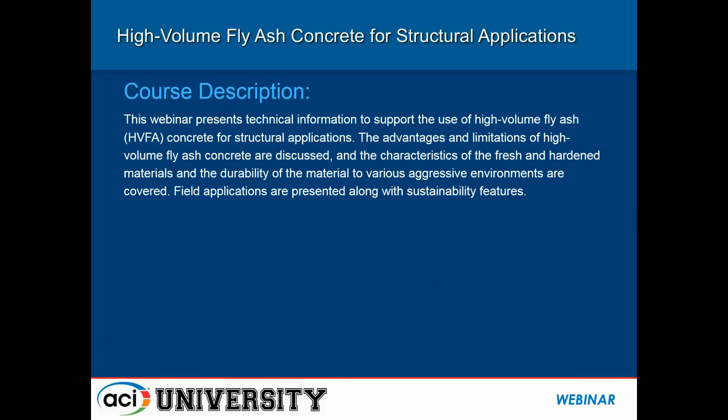ACI is an approved education provider for the American Institute of Architects, and this webinar has been approved for one learning unit. This webinar reviews the information found in ACI 232.3R-14, Report on High Volume Fly Ash Concrete for Structural Applications. Our learning objectives for this webinar are as shown on the screen. They are also shown in your handout.

And now I'd like to introduce our speakers for today. Bruce Ramme, PhD, PE, and Fellow of ACI, is the Vice President of Environmental Engineering at We Energies and is responsible for compliance, strategy and planning, mitigation and risk management, environmental permitting of new projects, compliance assurance and identification of new and/or enhanced means of benefiting the environment through the business practices of We Energies, the principal utility of Wisconsin Energy Corporation.

Another speaker today is Michael Thomas, PhD, Professional Engineer and Fellow of ACI. He is a professor and department chair in the Department of Civil Engineering at the University of New Brunswick and a registered professional engineer in the province of New Brunswick. He has been working in the field of cement and concrete research since 1983. Dr. Thomas's main research interests are concrete durability and the use of industrial byproducts, including pozzolans and slag.

Ivan Diaz-Loya is a research and developmental manager at Headwaters Resources in Taylorsville, Georgia. He is a member of ACI Committees 232, Fly Ash and Concrete, 240, Natural Pozzolans, and 236, Material Science of Concrete. He received his PhD from Louisiana Tech University. His research interests include fly ash reactivity in concrete, alternative supplementary cementitious materials, and reuse of coal combustion products. And now I will pass the presentation over to Ivan.

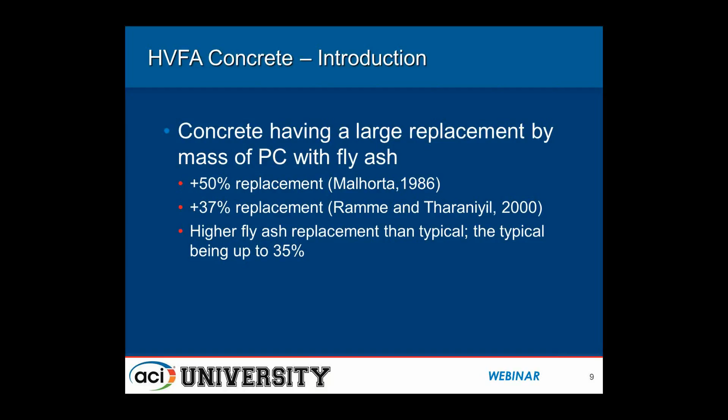Well, let's start with a definition, which is kind of a gray area. So what is high-volume fly ash concrete? ACI 232 defines it as concrete having a large replacement by mass of Portland cement with fly ash. But what is a large replacement? Malhotra in 1986 defined high-volume fly ash as more than 50%. More recently, Ramme and Tharaniyil in 2000 defined high-volume fly ash concrete as more than 37%.

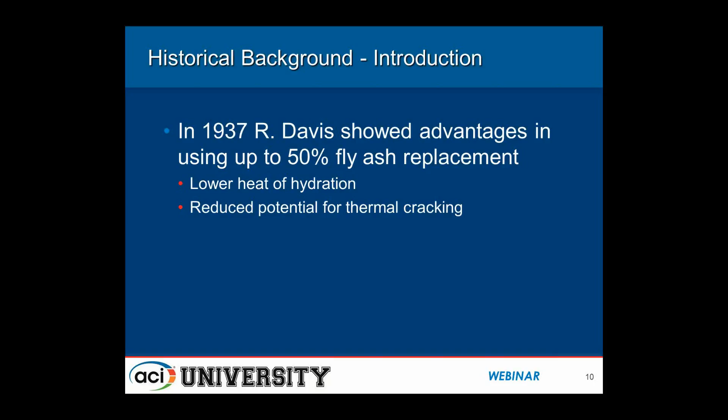Now, another definition is higher fly ash replacement than typical. And most would agree that typical would be considered up to 35%.

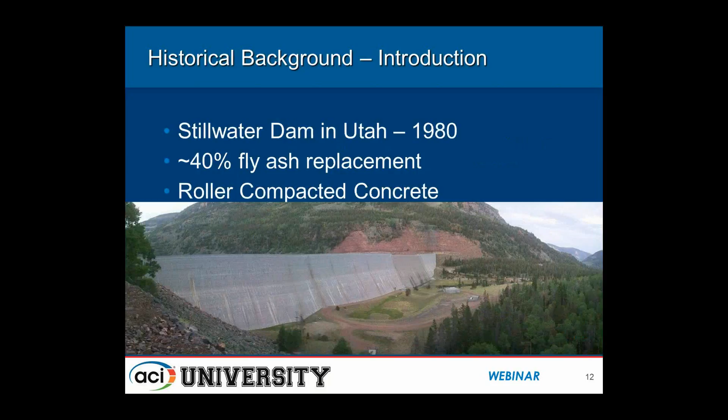So just to give you some historical background, Raymond Davis, professor from Berkeley, along with some of his colleagues, were the first to highlight the benefits of using fly ash up to 50%. The benefits they highlighted were lower heat of hydration and reduced potential for thermal cracking.

Their findings were applied in the construction of the Hungry Horse Dam in Montana. Another example is the Stillwater Dam in Utah, which was built in 1980 with roller compacted concrete with a 40% fly ash replacement.

Other applications of structures that have been built with high-volume fly ash concrete include roads, foundations, retaining walls, marine slipways, sewage treatment works, and concrete viaducts. And Bruce Ramme will speak more about examples in field applications.

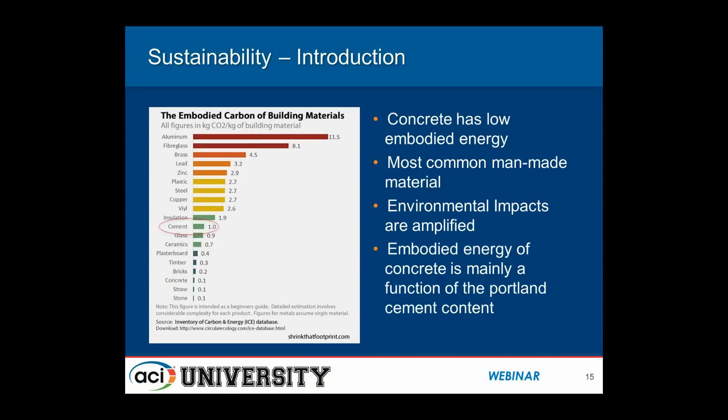So in recent decades, sustainability has been added as a major benefit of high-volume fly ash concrete, added to the lower heat of hydration and reduced potential for thermal cracking. Now, concrete has a relatively low embodied energy compared to other construction materials. However, it's the most common man-made material in the world, by volume, that is. That means that its environmental impact is greatly amplified due to the high volumes that are produced.

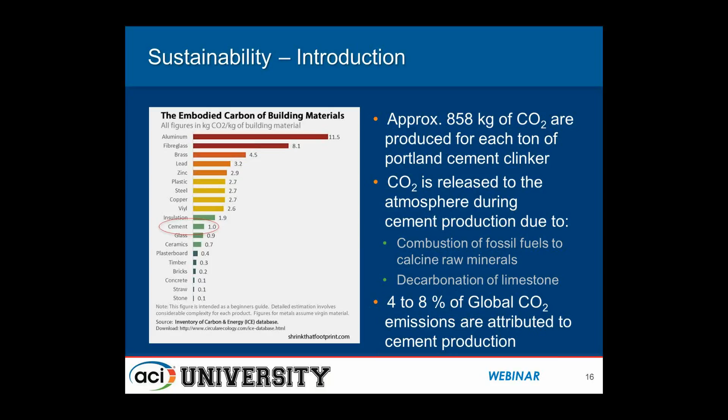And this embodied energy of concrete is a function of the Portland cement content in the mixture. That's because close to a ton of CO2 is released for each ton of cement that is produced. This comes from the burning of gas or whatever it's being used to fire the kiln, and from the decomposition of calcium carbonate into calcium oxide and carbon dioxide. Different authors attribute anywhere from 4 to 8% of the global CO2 emissions to the production of Portland cement.

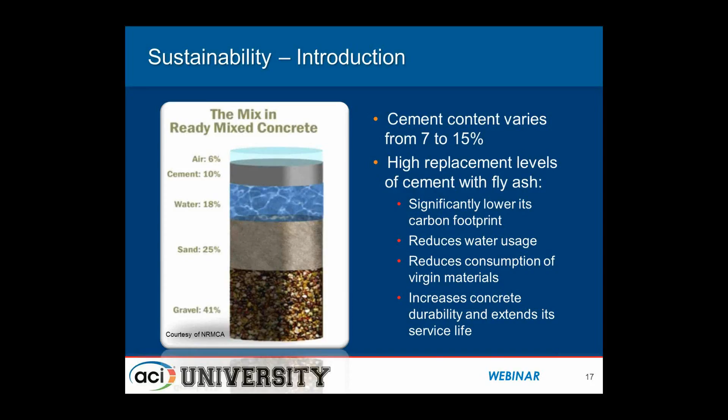So increasing the replacement level of cement with fly ash significantly lowers the carbon footprint of concrete. It also reduces water usage since fly ash typically lowers the water demand. It also reduces the consumption of virgin materials that are necessary for the production of Portland cement, and increases concrete durability and service life, which is actually one of the most important factors because you're avoiding demolition and building new again with the carbon footprint that entails.

High volume fly ash concrete can be split into two categories: general use and high performance. General use is typically adequate for requirements of 3,500 psi or less. It takes longer to set than regular concrete, and strength development is somewhat slower than conventional concrete. For this concrete, the strength requirements are typically extended to 56 or 90 days, and it contains no water-reducing admixtures.

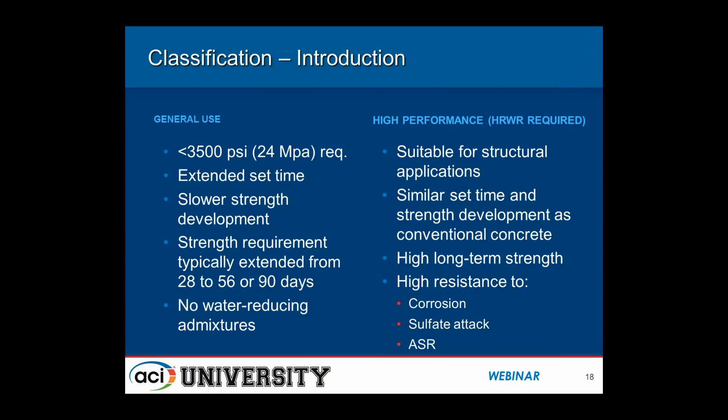High performance, on the other hand, requires the use of high-range water reducers and oftentimes accelerators. It can be used in structural applications. It can have the same set time and strength development as regular concrete, but it has very high long-term strength. Typically, the 1-year strength is double the 28-day strength. The durability benefits include high resistance to steel corrosion because of its low permeability, sulfate attack for the same reason, and ASR expansion because you essentially have a high amount of highly pozzolanic material.

Either Class C or F can be used in high volume fly ash. However, most of the work to date has been done with Class F. The C618 requirements are the same for both, except for the main oxides. For Class F, it has to be at least 70%, and for Class C, 50%. Class F comes from bituminous or anthracite coal, while Class C comes from lignites or subbituminous coal. Class F has a low calcium content, while Class C has a much higher calcium content. As a result, Class F has pozzolanic properties, while Class C has pozzolanic and cementitious properties.

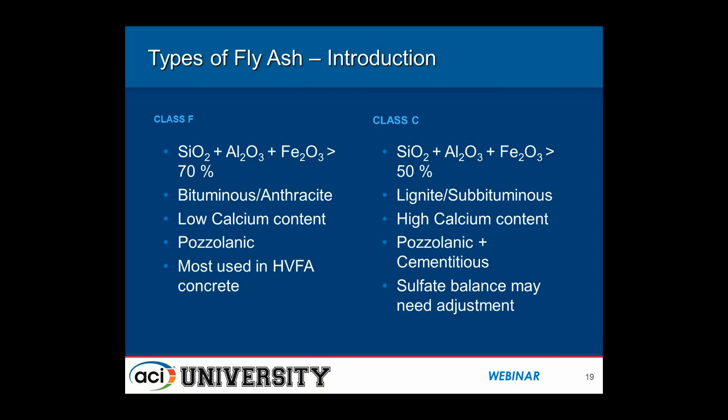Since Class C fly ash can add a significant amount of calcium or calcium aluminates to the system, the sulfate balance can be disrupted, which can potentially cause set time issues. For this reason, sulfate balance may need adjustment when using Class C fly ash at high replacement levels. So that's essentially why Class F is the most used type of fly ash used in high volume fly ash concrete.

Some quick facts about high volume fly ash concrete and codes and specifications. ACI 318 does not limit the amount of fly ash in concrete except when concrete is exposed to de-icing salts. In this case, the maximum replacement allowed is 25%.

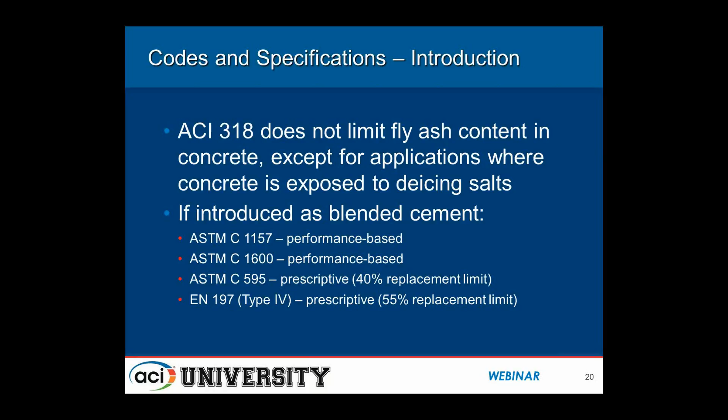If fly ash is pre-blended with cement, manufacturers can use ASTM C1157 and C1600, which are both performance-based specs, and thus do not limit fly ash replacement. Now, C595 can also be used, but this specification does limit fly ash replacement to 40%. On an international context, European standard EN 197 allows up to 55% replacement of the type 4 cement, which is what they call a pozzolanic cement.

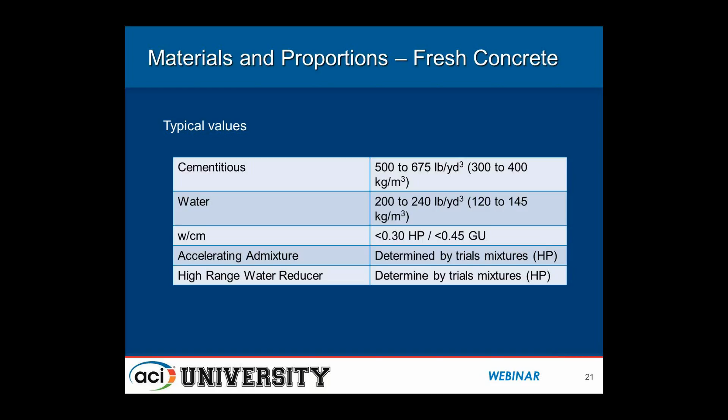These are the typical proportions for high volume fly ash concrete. Cementitious content going from 500 pounds to 675 pounds. In terms of water content, high performance concrete with high range water reducer will be closer to 200 pounds per cubic yard of water, while general use will be closer to 240 pounds per cubic yard. High performance will most likely contain an accelerating admixture and a high-range water reducer.

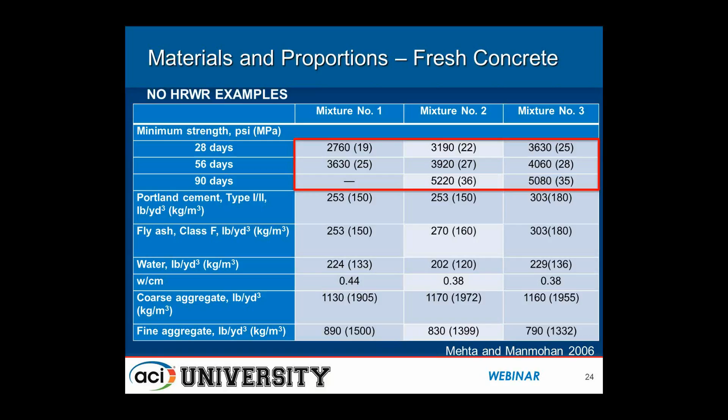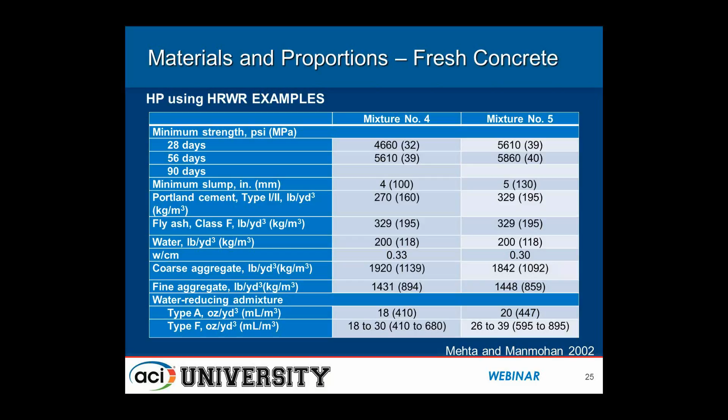These are three examples of general use mixtures given by Mehta and Manmohan in 2006. These mixtures contain no water reducer. As a result, the water-cementitious ratio is between 0.38 and 0.44, slightly higher, and the water content is between 200 and 230 pounds. The strength at 28 days is a little bit low, around 3,000 psi. But looking at the 90-day results, we see that it comes up to over 5,000 psi. So these are very typical examples of a general use high volume fly ash concrete.

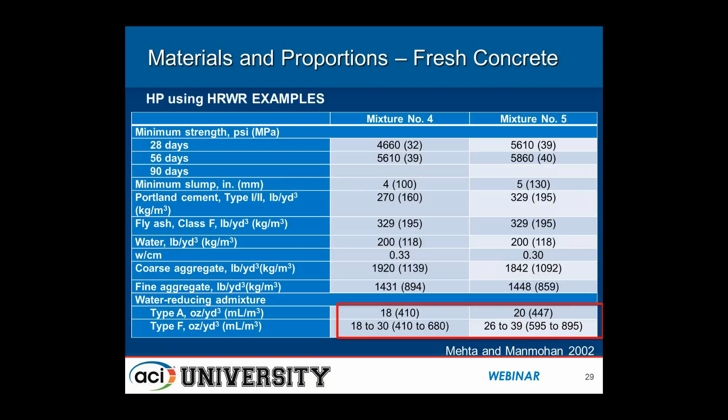Now these are two examples of high performance high volume fly ash concrete with high range water reducers. You can see that in these examples, the water to cementitious ratio is kept around 0.3, and the mixture has just 200 pounds of water. The strengths break 4,500 psi in 28 days, which is a typical requirement, and 5,500 psi in the case of mixture five. So this slump is 4 to 5 inches, even though you have only 200 pounds of water in your mixture, with a water cementitious ratio of 0.3. That's a big part because of the high-range water reducers we see here.

So some important characteristics to keep in mind in terms of workability. Class F fly ash reduces the water demand by around 4% for each 10% replacement of Portland cement. That means that if a conventional concrete mixture requires 300 pounds of water for a 3-inch slump, by replacing 50% of the cement with fly ash, you will reduce the water demand to 240 pounds to obtain the same slump, so around a 60-pound reduction.

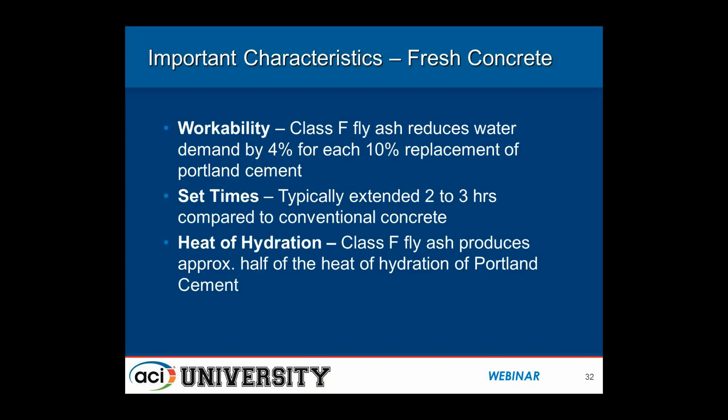Set times are typically extended 2 to 3 hours, but this can be corrected with the use of admixtures such as calcium chloride and calcium nitrate, and there's a whole wide range of accelerators out there. They are actually not based on chlorides, or do not contain chlorides, which is a big drawback for many people.

In general, Class F fly ash produces approximately half as much heat of hydration as Portland cement. Therefore, concrete with a 50% fly ash replacement shows approximately 75% of the adiabatic temperature rise when compared to Portland cement concrete, or regular concrete. So that's a 25% reduction, which is a big deal in terms of heat of hydration.

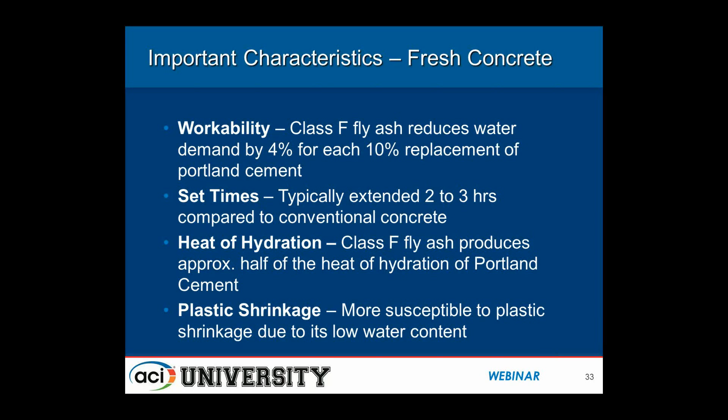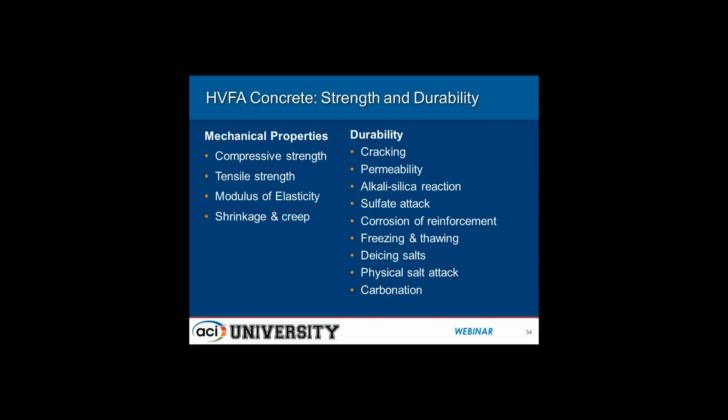Plastic shrinkage cracks, which are the cracks that develop while the mixture is still fresh, resulting from the evaporation of water from the pores of concrete, are more likely to occur in high volume fly ash concrete because of its relatively low water content. And that's it. With this, I finish my section of the webinar, and I'm going to pass on the control to Dr. Michael Thomas.

He will be speaking about hardened properties and durability of high volume fly ash concrete.

Good afternoon, everyone. So I'm going to cover these topics in approximately the same order that they appear in the recent ACI 232 guide on high volume fly ash concrete.

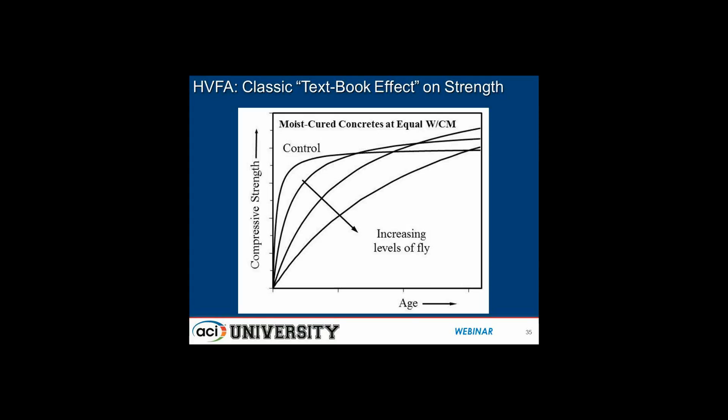This is a sort of classic textbook effect that we see of high volume fly ash on strength. What we would tend to see is any level of fly ash on strength, we see a depression in the initial early age at 1 or 2 days at 25%. Eventually, the strength will catch up, and the more fly ash we put in, the more we generally reduce the early age strength, and the longer it takes to catch up. But it does eventually catch up.

Now, this is, as I say, a textbook effect if we actually produce concretes with equal water cementing materials ratio. I wanted to share some data with you from research conducted by a consortium of CanMet and Hydro-Quebec in Canada, where they produced a number of very large monoliths, as you can see here, 8 by 13 by 16 feet. It had 2 control blocks and 3 blocks with 55% fly ash. I'm just using this as a demonstration.

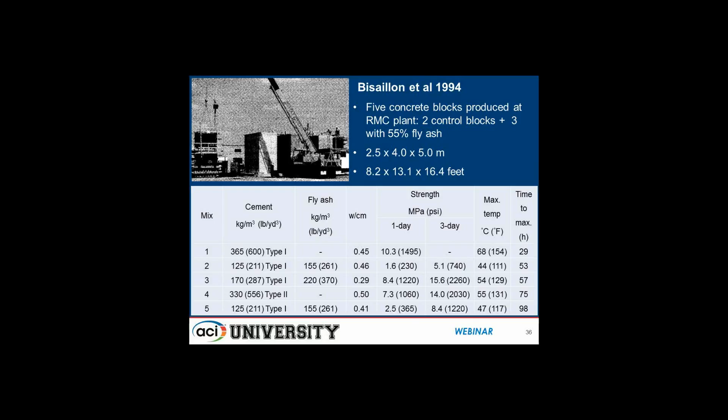In this program, in addition to casting these monoliths, the main reason for casting them was to look at the temperature development and the risk of cracking as a result of the cooling from that autogenous temperature rise. So they cast a whole bunch of cylinders from these concretes as well, and I'm going to use them as an illustration of the mechanical properties of high volume fly ash concrete.

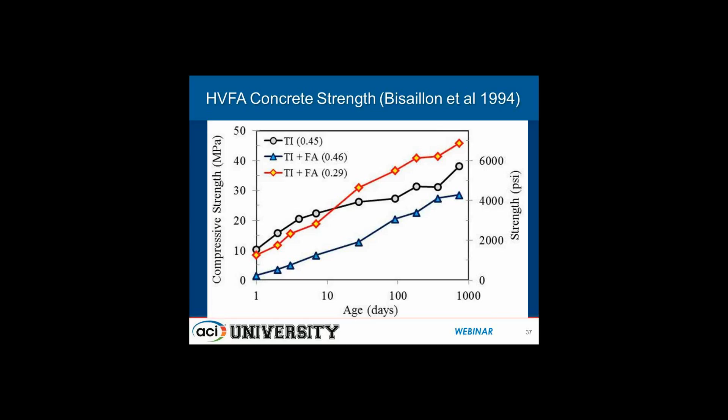Now, an alternative to this type of design is to design the high volume fly ash concrete with a lower water cementing materials ratio, taking advantage of the ability of fly ash to lower the water content, lower the water demand, so you cast concrete with a lower water content, and also taking advantage of superplasticizer being used with that. And we can see here we actually get strength parity. We get much less reduction of early age strength. The concretes have parity in strength by about 28 days, and the longer term strength is much improved. So we can produce, even with high volumes of fly ash, 55%, by redesigning the mix, taking advantage of the water reduction and the effects of superplasticizer, we can actually get equivalent strength at relatively early age.

One of the things we don't do enough of in North America is we concentrate on the properties of lab-cured cylinders to derive our strength. In situ strengths may be very much higher. Fly ash responds very well to the increase in temperature as a result of hydration. And what we're seeing here is some results. I should note this has been done at 30% fly ash.

We need to conduct similar work at higher levels, but this is the kind of effect you get. On the left, we see the classic response: fly ash having lower strength at 3 days, roughly equal strength at 28 or 56 days, and much improved strength at 90 days.

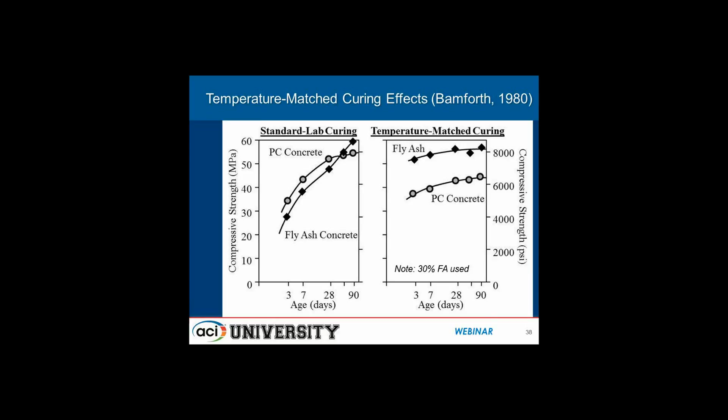If we actually did temperature matched curing, we would match the temperature of our cylinders to the temperature achieved in situ in a large pour. What we see is that temperature match curing actually impairs the later age strength of Portland cement concrete, but much improves both the early age and later age strength of fly ash concrete. So in situ, we may actually be getting equivalent strength at relatively early ages, even when we use a high volume of fly ash. That's something worth considering.

So if we see a reduction in strength, we'll see a reduction in compressive strength, modulus, tensile strength, and flexural strength too. We can use the same relationships typically used to predict these properties based on the compressive strength.

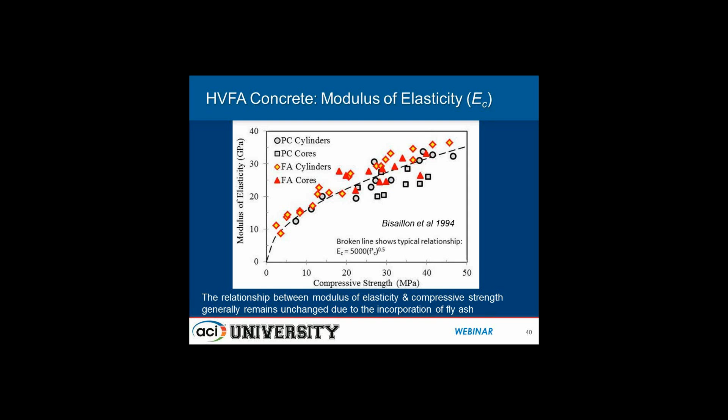The broken line shows a typical relationship used to predict modulus based on compressive strength. In units of megapascals, the modulus is 5,000 times the square root of the compressive strength. There's a very similar relationship, just a different constant, for predicting it based on PSI.

This graph shows the modulus of rupture, or flexural strength, as a function of compressive strength - we have less data here - and again shows the typical relationships used to predict flexural strength based on compressive strength. You can see, with one exception, the same relationship applies for fly ash as for Portland cement concrete.

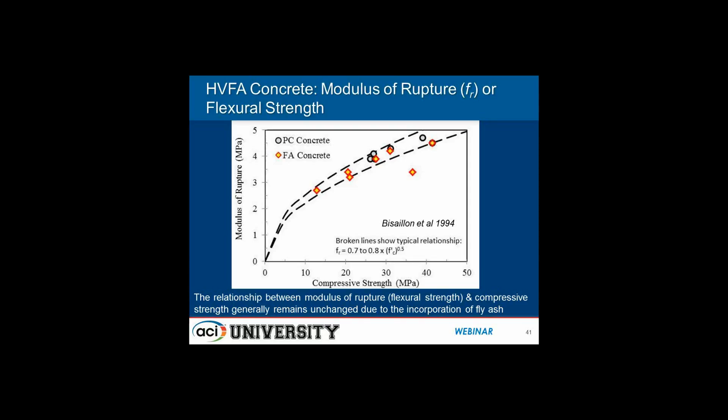So to wrap up on those properties: if you see an increase in compressive strength, you'll see an increase in the other mechanical properties. If you see a decrease in compressive strength, you'll see a reduction in the other mechanical properties. Strength remains a good predictor of mechanical properties, and the relationships used don't change regardless of whether you have 55% fly ash in there or not.

Looking at creep is very difficult because it really depends on things like when the concrete's loaded. If you load concrete at early age, you can get higher creep in fly ash concrete because it has lower strength at early age, so the stress-strength ratio is increased. If you load concretes when they achieve the same strength, the creep of fly ash will be less long-term because of the significant long-term strength gain for the fly ash concrete during the test. So really it depends on the nature of the test.

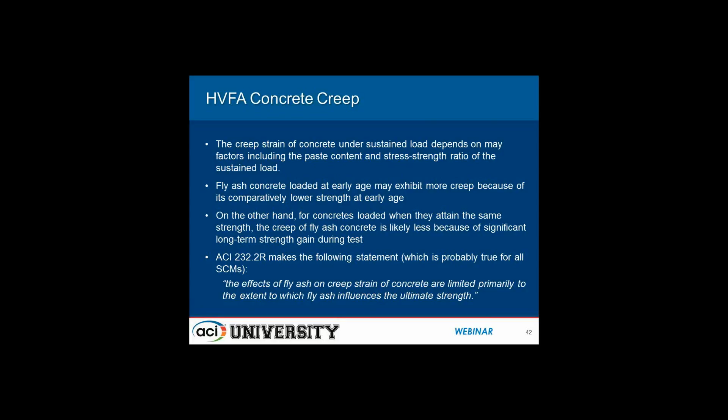In ACI 232.2R, the following statement is made: the effects of fly ash on creep strain of concrete are limited primarily to the extent to which the fly ash influences the ultimate strength. So again, we're seeing the same effect of strength - if you achieve equal strength, you'll achieve equal other mechanical properties. This statement is probably also true for concrete that contains other SCMs like slag or silica fume.

Switching to durability, generally high volume fly ash will be beneficial in terms of reducing the potential for cracking. This is largely due to the reduction in heat produced. It's also a function of having a fairly low modulus at early age, which helps some of the shrinkage be relieved by creep.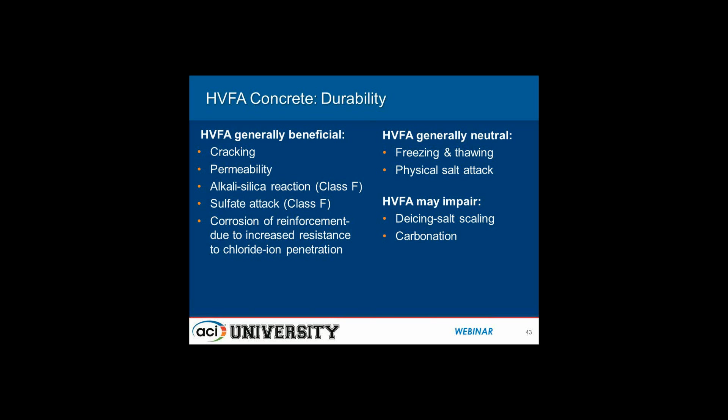Generally, fly ash content, high volume fly ash, has a neutral effect on freezing and thawing. That's the classic cyclic freezing and thawing in air-entrained concrete, and also on physical salt attack. But the Achilles heel here is that high volume fly ash may impair de-icer salt scaling and also impair carbonation, and carbonation is another means for inducing corrosion of reinforcement. The benefits almost undoubtedly outweigh the cons in terms of performance and durability.

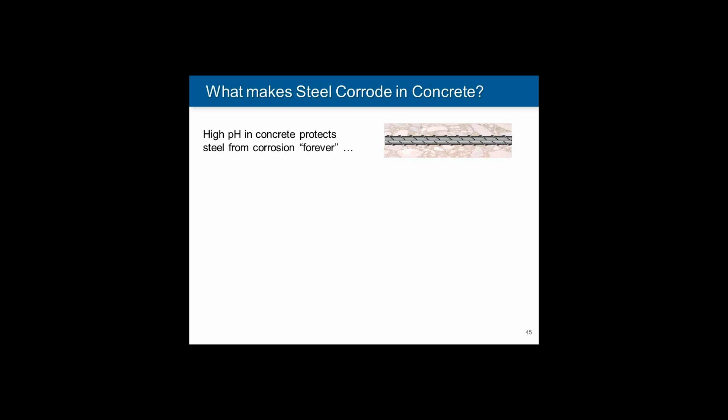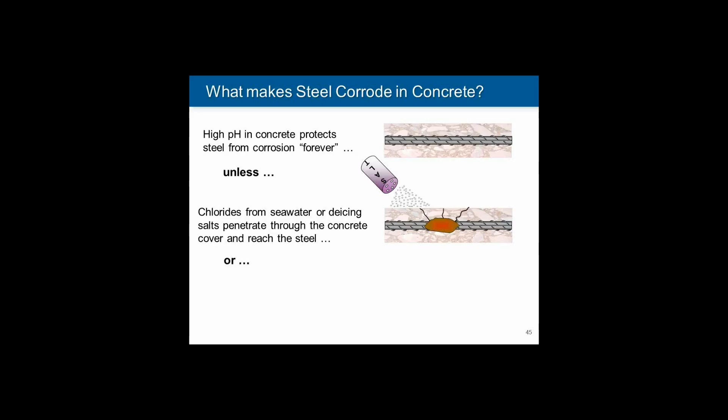Generally, concrete has a high pH, and it should protect steel from corrosion forever unless one of two things happen. One is that chlorides from seawater or de-icing salts penetrate through the concrete cover and reach the steel, in which case corrosion of a rebar will happen and eventually the concrete will crack and spall.

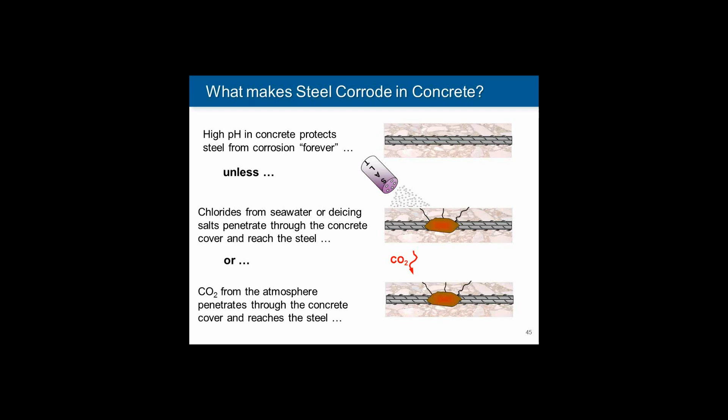The other process that is less talked about is the process of carbonation, where CO2 from the atmosphere penetrates through the concrete cover and reaches the steel. When that happens, it reduces the pH of the concrete around the steel, and again, corrosion can occur. Carbonation is a much rarer form of deterioration than chlorides.

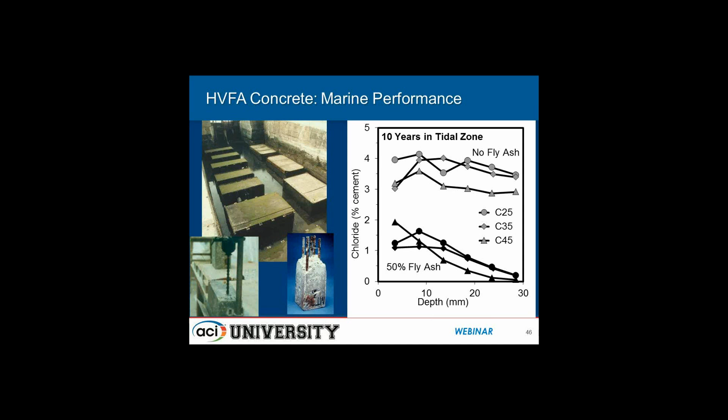The black dots below show the results for 50% fly ash, which show a much lower ingress of chlorides into these concretes after a 10-year period, again, regardless of the quality of the concrete. Fly ash really is extremely effective at reducing chloride ion penetration, and it becomes more effective the more fly ash that you have.

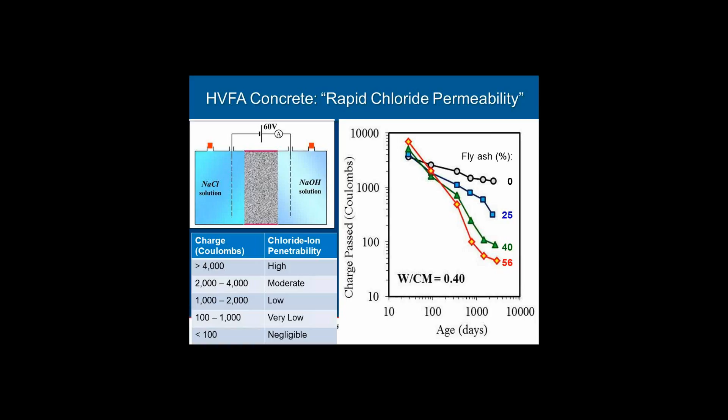As we add fly ash at very early age, we might see small increases in the Coulomb value, especially at very early age. But the fly ash concrete gets better with age, and the rate at which it gets better increases with the fly ash content. By the time we get to very mature concrete, concrete with 40 or 56% fly ash will achieve Coulomb values below 100, which is essentially negligible chloride ion penetrability. So you can see the impact of fly ash on chloride permeability.

Alkali-silica reaction: there are literally hundreds of publications demonstrating that Class F fly ash is a very effective means of controlling ASR. The amount of fly ash you need varies depending on the reactivity of your aggregate, how much alkali is in the Portland cement, and other parameters. Generally, the more Class F fly ash you put in, the more protection from ASR you'll get. With extremely reactive aggregates, you might need to go as high as 30 to 40%, maybe even higher.

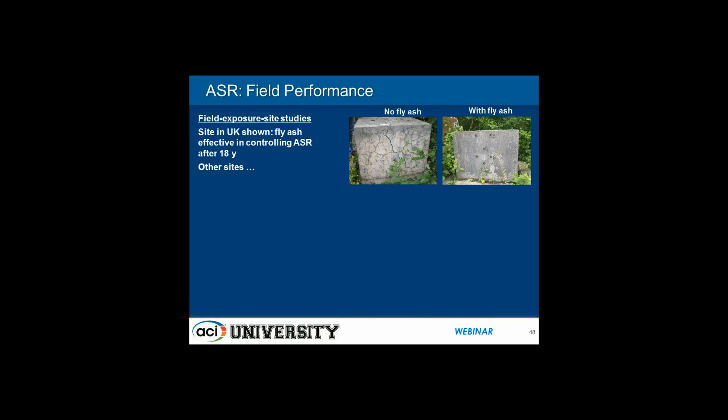But generally, in most cases, 25 to 30% is enough to control ASR. Rather than show all the lab data, I'm just showing some examples of field performance. This is an exposure site in the UK. On the left, you have no fly ash - an 18-year-old concrete, extensively cracked, as you can see. On the right, we have 25% fly ash with absolutely no cracking. As I said, with Class F fly ash, the more you put in, generally the more protection from ASR you're going to get.

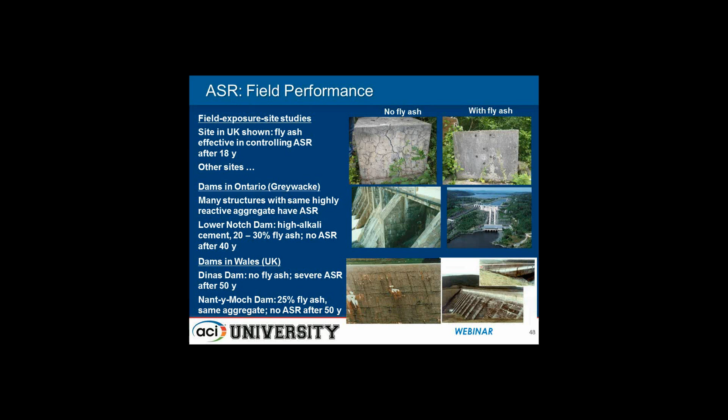Just a last field example - I like this one because these are 50-year-old dams. They used exactly the same aggregate. They were built as part of the same hydroelectric scheme. They used exactly the same aggregate. The one on the left used no fly ash. The one on the right used fly ash to control heat, and they also controlled ASR. They didn't know this would be the case when they constructed it, but it clearly has eliminated ASR.

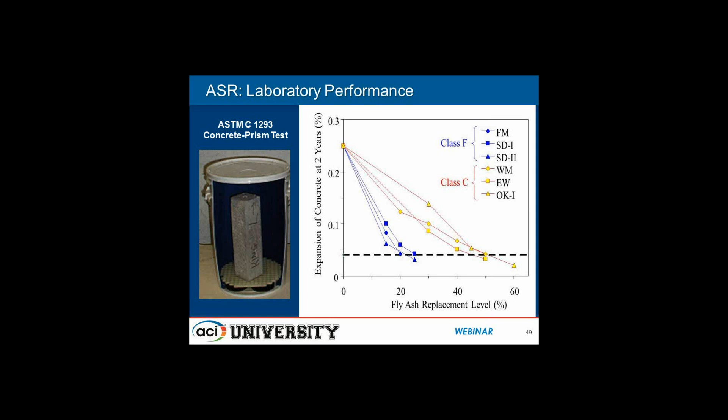So Class F fly ash is known to be very effective. What this graph shows is the results of a concrete prism test, a 2-year test for evaluating fly ash, slag, or silica fume. The blue line shows Class F fly ash, with 20 to 25 to 30% effective in reducing the expansion at 2 years to less than the specified maximum. When we move to Class C fly ash, it's less effective, and we may need in excess of 50%, maybe even 60%, to control ASR expansion in the lab. So Class C fly ash is not as effective in this role.

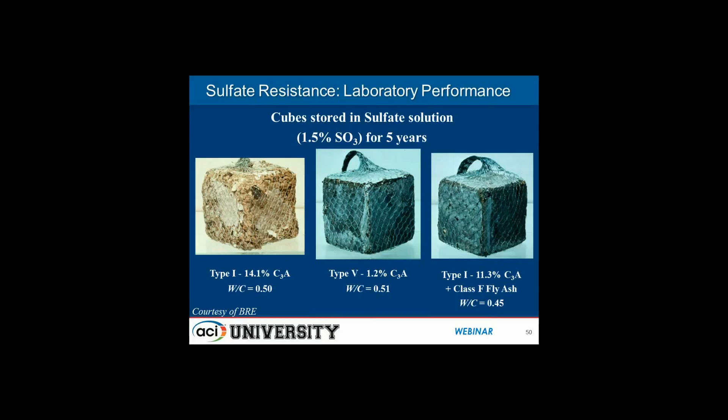Sulfate resistance: again, there are literally hundreds of papers showing that Class F fly ash can mitigate sulfate attack. I'm just showing you a nice pictorial representation of that. We have a type 1 ordinary Portland cement on the left that's been in sulfates for 5 years - it's extensively damaged. We can cure this damage or prevent it by using sulfate resisting, type 5 cement, or we can cure it by taking the original type 1 cement and putting in sufficient Class F fly ash to control expansion. Again, with sulfate attack, the more fly ash you put in, the more protection you'll get.

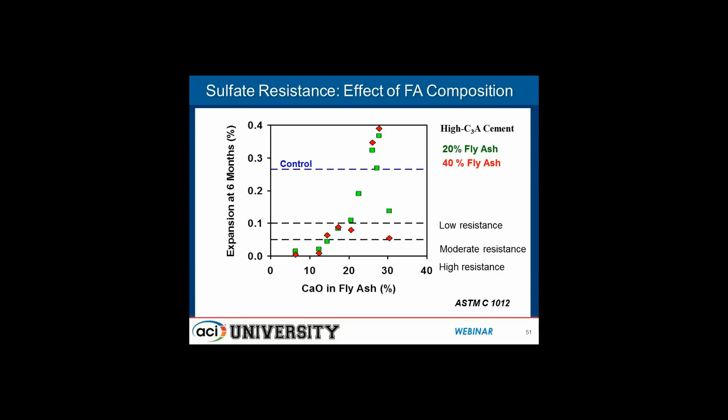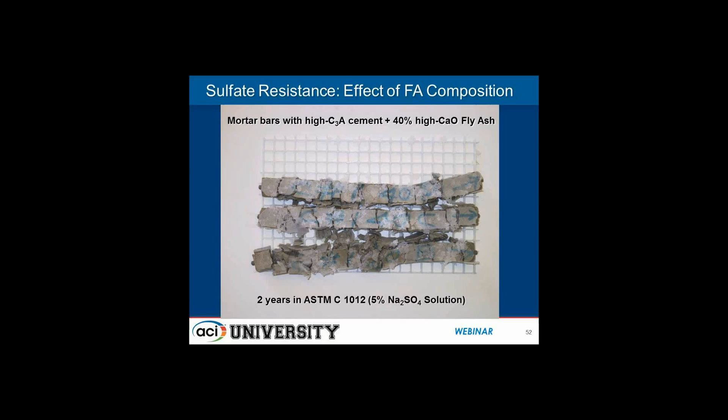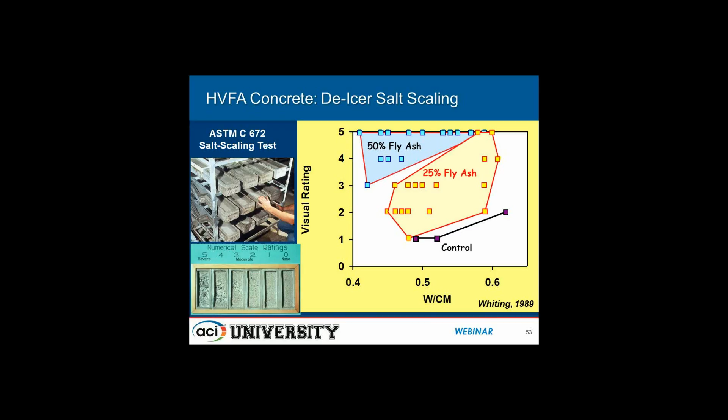This just shows that the nature of the fly ash is important. What we're seeing here is expansion at 6 months in the ASTM C1012 test. With the low calcium fly ashes, we're seeing very good control of sulfate attack. But as the calcium content of the fly ash gets higher - in other words, we move from an F ash to a C ash - the sulfate resistance gets inferior. We can see very severe deterioration with a high level of Class C fly ash in a sulfate environment. So with both ASR and sulfate attack, we have to remember that Class F fly ash is very effective, and Class C fly ash less so.

Deicing salt scaling—generally lab testing will show you that you get worse scaling resistance, you get higher visual rating as you increase the fly ash content. That's shown here, with 50% fly ash having very severe numerical scale ratings.

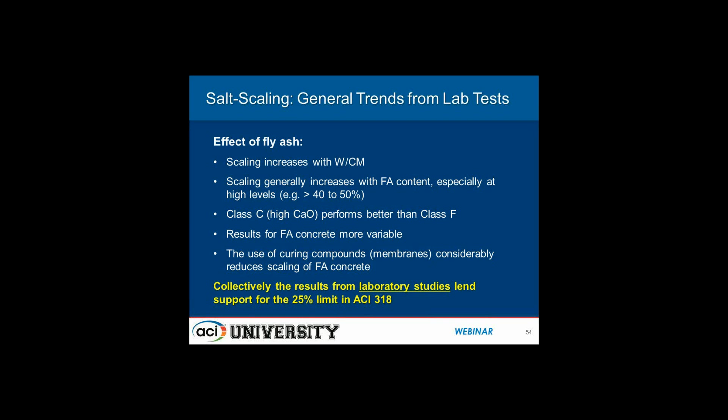If we looked at all the trends from lab tests, we'd see that the effect of fly ash on scaling increases with the water-cementitious material ratio and increases with the fly ash content. Once you get above 40 to 50%, generally the lab performance is quite inferior.

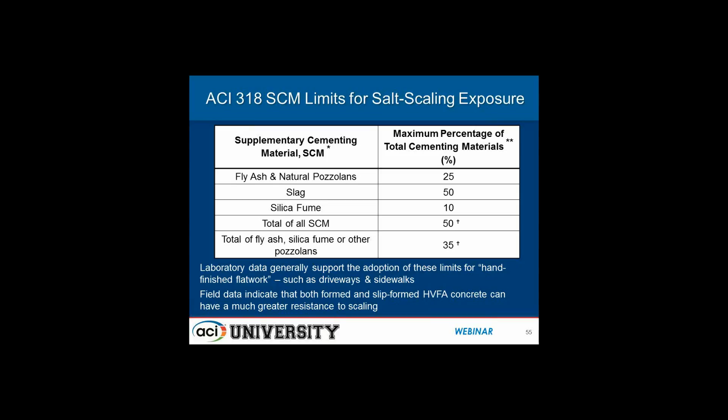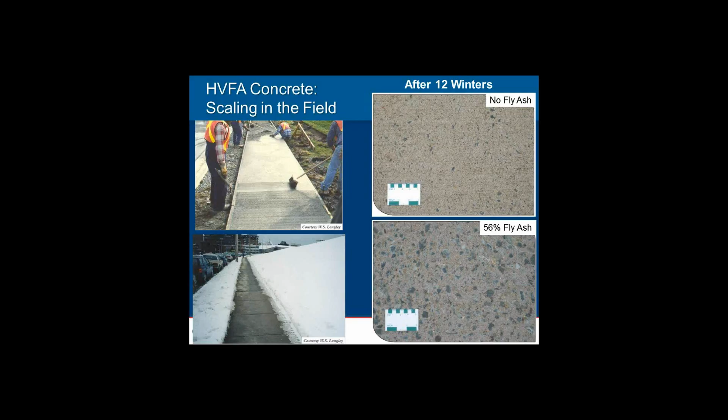I agree with this limit for what I call hand-finished flat work, concrete such as driveways and sidewalks—this is the type of concrete where we see most scaling. The field data generally indicate that both formed and slip-formed fly ash concrete can have much greater resistance to scaling. I don't mean greater than straight Portland cement, but certainly greater than hand-finished flat work.

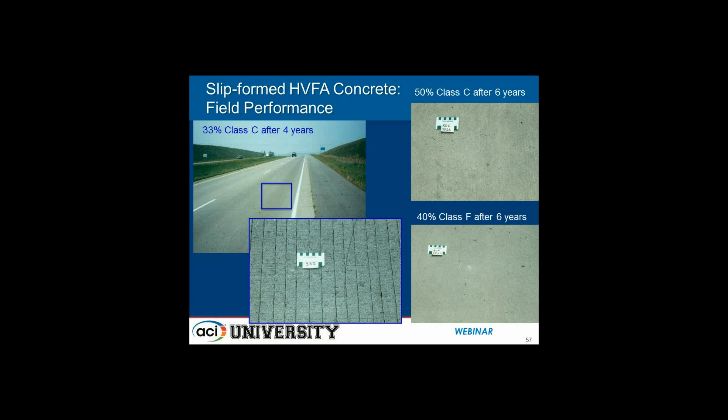Here's an example of some hand-finished flat work—this is a sidewalk in Halifax, and you can see the difference after 12 winters between concrete without fly ash and 56% fly ash. However, there are literally hundreds of examples where slip-formed or formed concrete surfaces have survived many, many years with relatively high levels of fly ash. So it can be done.

Now, you might think 4 years or 6 years is not a very long time to test scaling, but generally with scaling, if you can see the deicing salt scaling, you'll see it in the first year, definitely by the second year. If it survives 3 years without scaling, generally it won't scale.

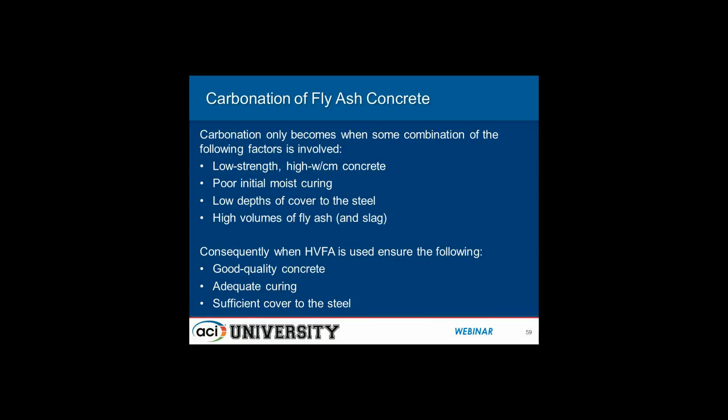Carbonation is only really an issue when two or more of the following factors are involved: low strength, high water-cement ratio concrete, poor initial moist curing, low depths of cover, and very high volumes of fly ash or slag. Consequently, this shouldn't be a deterrent to using high volumes of fly ash. When they are used, we have to ensure we have good quality concrete, adequate curing, and sufficient cover to the steel. I'm now going to pass on to Bruce Ramme.

Thank you. Well, thank you, Mike, and it's a great honor to be on this webinar with all of you this afternoon. High volume fly ash is my favorite topic.

I'm going to continue to follow the committee report with Chapter 6, which is on field applications, and then a little bit on sustainability—and so I don't forget it, the references that are listed are very valuable, especially if you haven't had experience with high volume fly ash before.

I point you there because we've had, in my opinion, a great record with over 25 years of use here at our company, and there's a wide range of applications. You've seen some examples already presented to you by the prior speakers.

One of the main things I'm going to try and point out is learning experiences from my work with high volume fly ash concrete: early involvement in projects. Pictured here on the screen right now are the Oak Creek expansion units—this is a relatively new power plant here at We Energies, and it's over a $2 billion project. What was key here was sitting down with the design engineers and contractors very, very early in the planning to let them know we had an excellent source of fly ash right here and that we wanted to showcase it in our project.

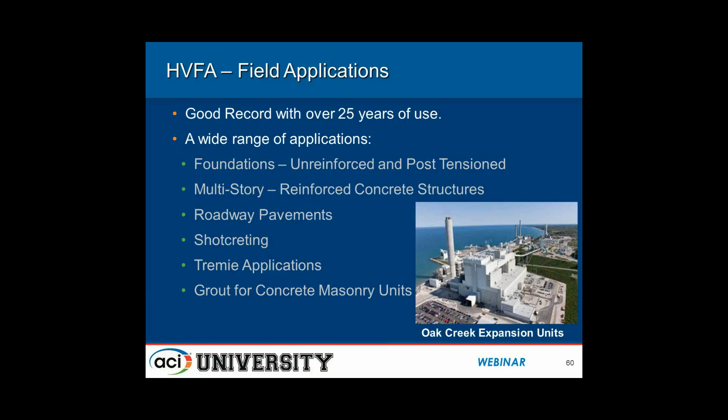And again, with that early involvement—when you're not trying to change specifications later—you can jointly have great success. Just about everything concrete in that photograph has fly ash in it, and some of it up to 50% high volume fly ash concrete.

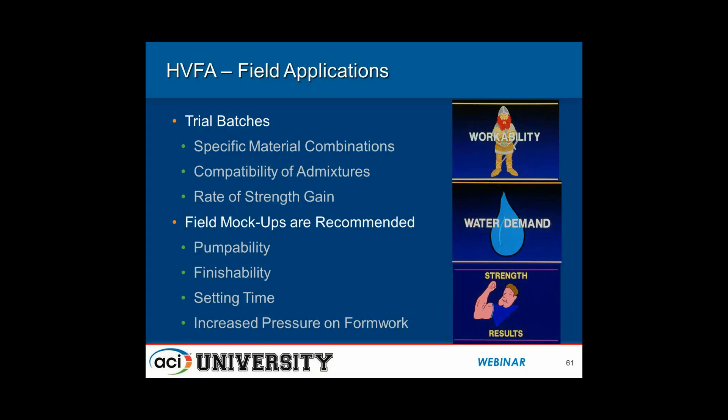The second slide here on field applications, the trial batches are essential. I can't overestimate this slide or emphasize it enough. The trial batches are going to save you a lot of headaches when you go out into the field, and you have to be using the specific material combinations that you plan to work with. Someone changing an admixture can have a very serious effect on the performance of the concrete.

Again, if you're doing something substantial, a field mock-up helps you gain experience with the pumpability, finishability, and setting time, which is very connected to temperature, like all concrete, but probably even more sensitive in this case, along with the increased pressure on formwork I'll be mentioning.

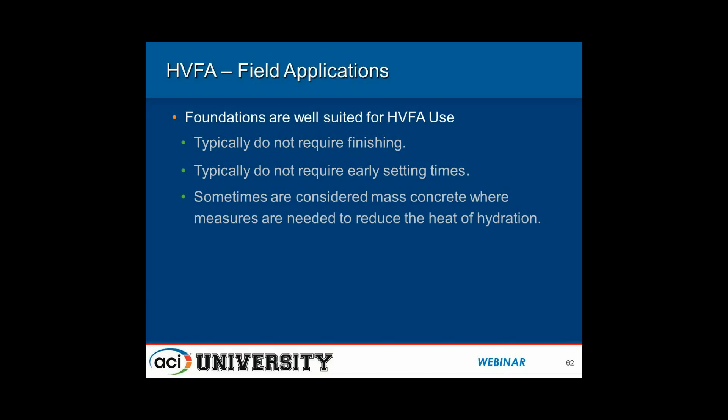So if you're just beginning to learn about high volume fly ash concrete, foundations are a good place to get your feet wet. Typically they don't require finishing, there's not often a requirement for early setting times, and sometimes these are considered mass concrete, where measures are needed to reduce the heat of hydration, and high volume fly ash concrete has that attribute as well.

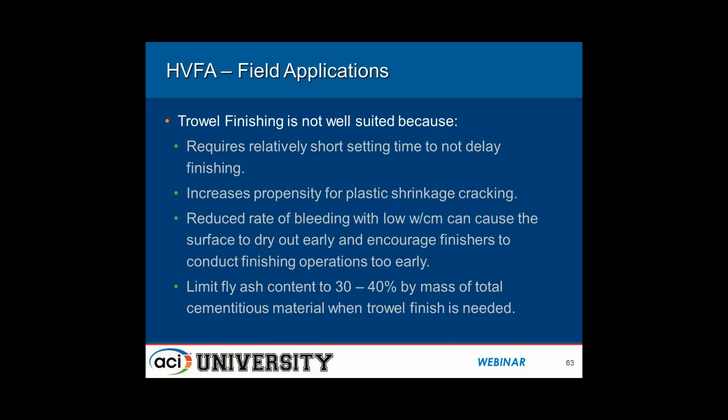If you're going into something that requires trowel finishing, whenever I hear that, the first thing I ask is, do you really need a trowel finish? Because trowel finishing is an art, and sometimes this is overdone. But this can introduce some challenges with high volume fly ash concrete. It requires a relatively short setting time to not delay the finishing, increases the propensity for plastic shrinkage cracking if the timing's off, and the reduced rate of bleeding, because we're typically working with a low water to cementitious materials ratio, can cause the surface to dry out early and encourage finishers to conduct finishing operations too early.

So here we limit our fly ash content to 30 to 40% by mass of the total cementitious material when a trowel finish is needed, for special floors and things like that where it really is required.

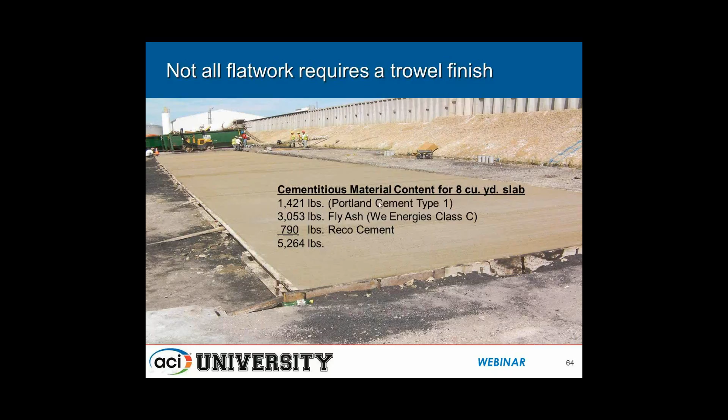I put this photograph in here. This isn't a great glamorous project, but it makes the point that not all flat work requires a trowel finish. This is a high performance concrete slab on grade, an 8 cubic yard job, I think 8 inches thick. It was used as a place for luggers and dumpsters to be placed, and if you have any experience with that, they're dropped, the wheels get caught, you get gouging. So we wanted some high strength here.

This was over a 70% fly ash application in the concrete mixture that was used. And if you look in the background there, you'll actually see a controlled low-strength material buttress for the precast wall that's there, which also worked out very well.

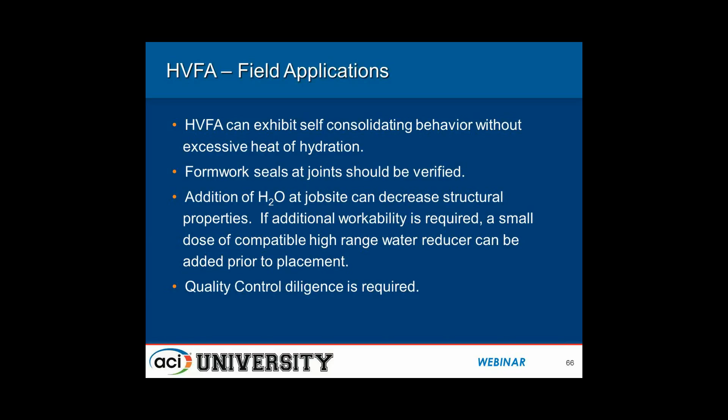Another point is that when doing mass concrete, people are used to using retarding admixtures to control heat of hydration. If you're working with high volume fly ash concrete and somebody's messing with a retarder, you want to know ahead of time how that behaves. I can think of a large foundation for a wind turbine where somebody had changed the admixture with good intentions, but they put that foundation to sleep for quite a long period of time. Eventually the strength came, but most of us wouldn't want to wait that long.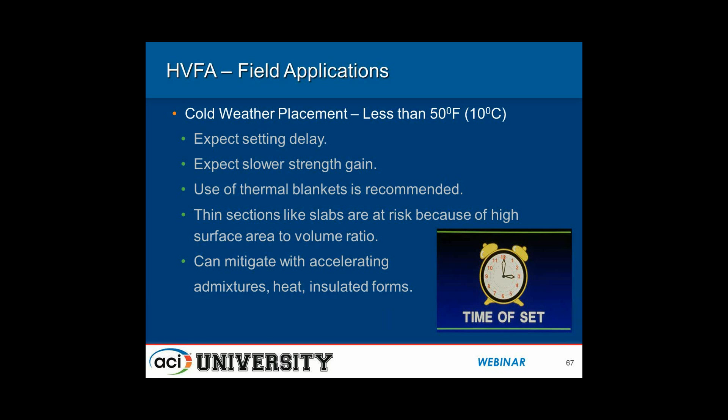Cold weather placement is an even more serious consideration when working with high volume fly ash applications. Less than 50 degrees Fahrenheit, expect a setting delay. You have to be patient for the slower strength gain. You can do some things like using thermal blankets, especially since thin sections are more susceptible. There are other ways to mitigate, with accelerating admixtures, the addition of heat in aggregate, or insulated forms.

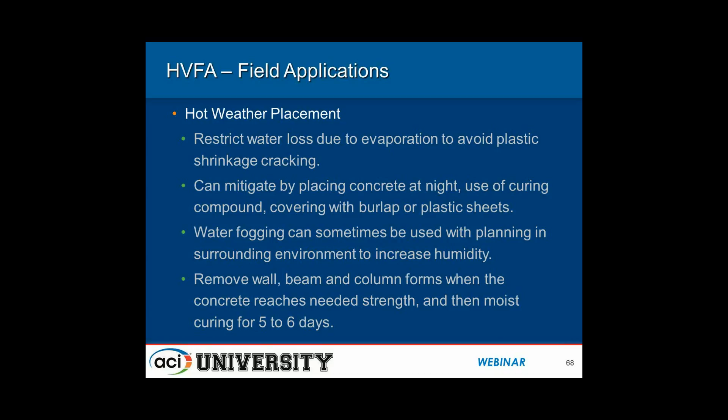Hot weather placement is also an important consideration. You're working with a concrete that typically has a low water to cementitious materials ratio, so you want to restrict loss of water due to evaporation and avoid plastic shrinkage cracking. You can mitigate this in a hot climate by placing the concrete at night, using curing compounds to keep the water in there where it's needed, and covering with burlap or plastic sheets. Water fogging, if you're planning ahead, can help increase humidity and reduce evaporation. And the removal of forms, paying attention to the concrete strength you need, and continuing with moist curing.

Curing is important for all these concrete applications. I think Mike mentioned scaling resistance. One of the things we learned early on was to cure your concrete, because that has, in our case, provided better performance.

The report also talks about barriers to use and some solutions. A lot of times specifications are written prescriptively, so many pounds of this and so many pounds of that, versus a performance specification where you're looking for a strength at a certain age or other properties. I think what we're doing today is trying to provide some informative education, and just having experience with it isn't widespread out in the industry. Use of in-place strengths for early age strength development, so you know what you're actually working with out there, especially when you're working with something new.

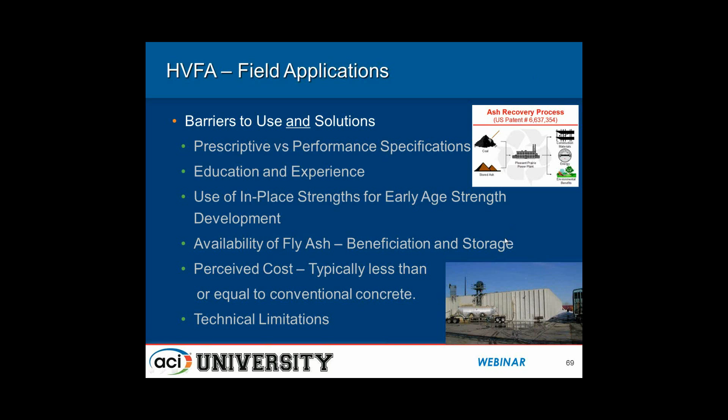Availability of fly ash is a concern. We're an electric utility and gas utility, and we're building additional storage facilities to ensure we have concrete quality fly ash available in the quantities needed. There are beneficiation technologies out there that allow fly ash that maybe hasn't been usable in concrete in the past to be converted to something very usable. A lot of people look at this and see something they don't have experience with, and see a higher cost. But our experience is that this is less than or equal to the cost of conventional concrete.

Technical limitations, we heard about some of those, especially around durability. Those are all real considerations. Going back to the previous slide, this is a picture of one of our storage facilities, and the ash recovery process shown is one where we take ash from the past and reburn it to produce new fly ash for concrete.

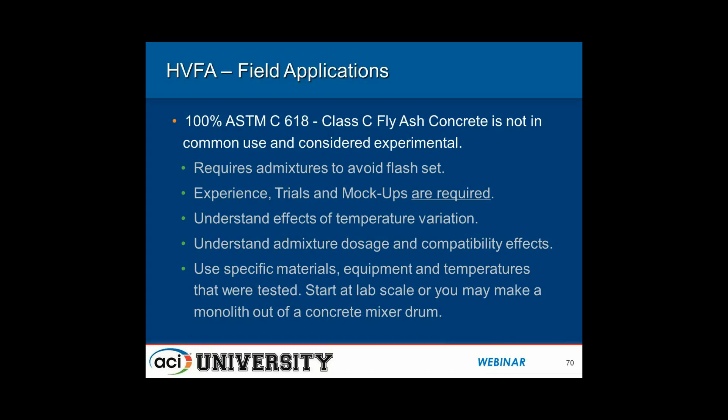Sometimes you'll hear little bits about 100% Class C fly ash concrete, and this is not in common use, and I would consider this experimental. It is covered briefly in the report, but this requires admixtures to avoid a flash set in many cases. Experience, trials and mock-ups are required if you're going to go down this path. Understand the effects of temperature variation, those dosages, and the compatibility of the materials you're using, and use those specific materials when doing the trials. Don't change things. I recall early in my career a fellow that tried this and rocked up a whole concrete mixer drum. You don't want to have that experience. It also gets very hot.

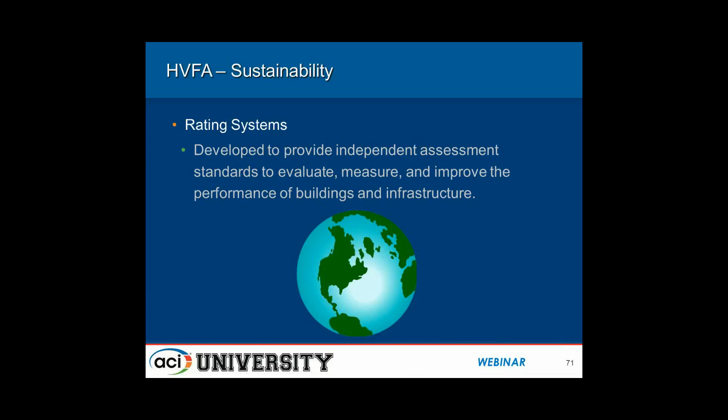Switching over to sustainability, I think we hear of LEED many times, and there are other rating systems out there, developed to provide an independent assessment and evaluate the performance of buildings and infrastructure. When I think of sustainability, I'm thinking about making wise choices today around conservation and efficient use of materials, so that the people who come after us have something yet to work with.

Sustainability typically has 3 dimensions. You're looking at the economic, environmental, and social aspects of systems. And the rating systems have similarities.

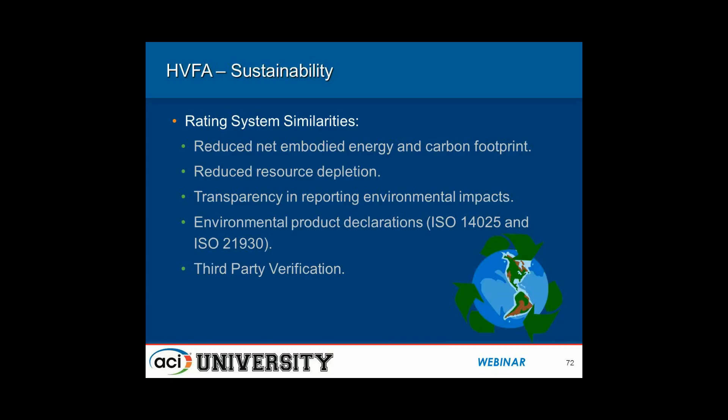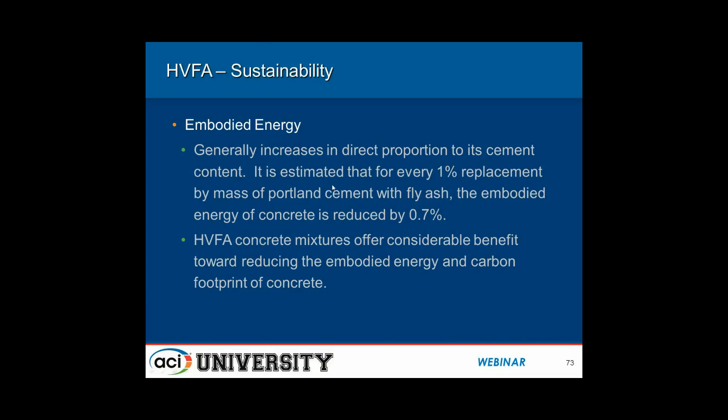The reduced net embodied energy and carbon footprint are very important, along with reducing resource depletion and transparency in these systems in reporting environmental impacts. The ISO standards listed here provide some guidelines on sustainability and environmental product declarations, and typically there's third-party verification involved.

Embodied energy generally increases in direct proportion to cement content. High-volume fly ash concrete mixtures offer a considerable benefit in this regard towards reducing embodied energy and the carbon footprint.

Lifespan - if you do it right, you can increase the life of your structures. I know there's a bridge about 6 blocks from my office with a 75-year warranty, and yes, it does have fly ash in the concrete. As the lifespan of the structure increases, the ratio of initial embodied energy to total energy decreases, because over a longer period of time it becomes less significant in comparison.

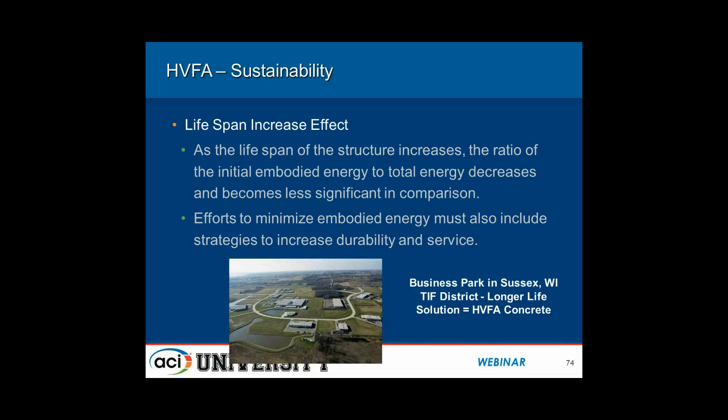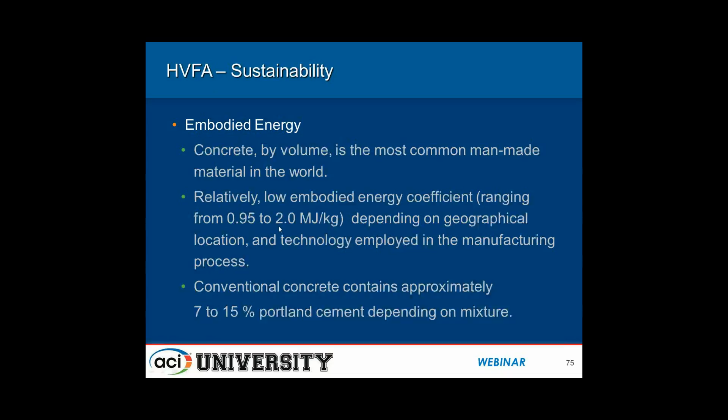The photograph embedded here is a business park from Sussex, Wisconsin, where they used one of these tax incremental financing districts, with a 30-year life requirement. The original design that came in was asphalt, but most asphalt I have experience with doesn't have a 30-year life. The solution was high-volume fly ash concrete for economic reasons and durability, and it's been performing out there for probably half of that life already.

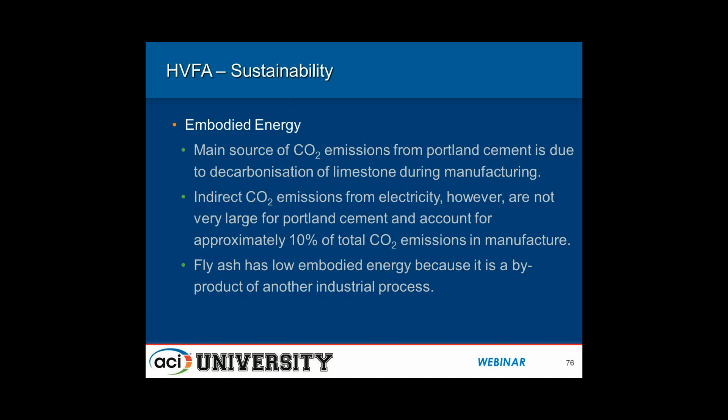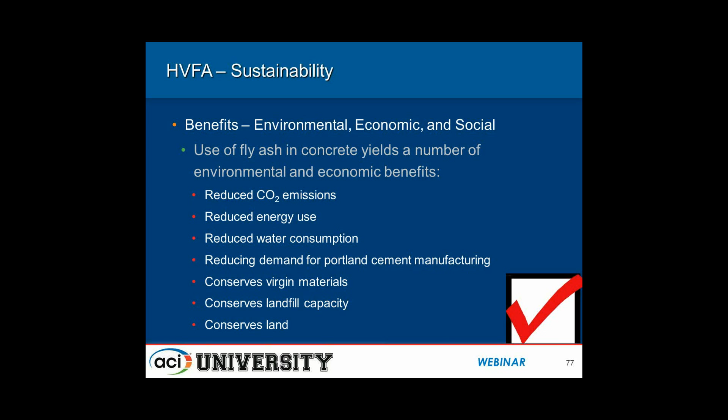Again, embodied energy - concrete by volume is the most common man-made material in the world, and it has a relatively low embodied energy coefficient when you look at mass and volume. The main source of CO2 emissions comes from the decarbonization of limestone during manufacturing of Portland cement, with about 10% addition from electric power use in manufacturing. Fly ash has low embodied energy because it's a byproduct of another industrial process.

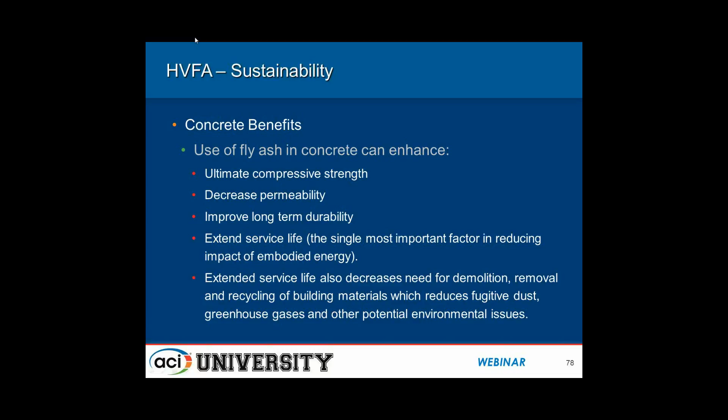Coming up in conclusion, the benefits when you look at sustainability - I'm not going to read this list, but reduced CO2 emissions, conserving land and natural resources, all very important. And the concrete benefits - fly ash and high-volume fly ash, just understanding your materials and how they work, brings so much to the extended service life. The longer it's out there, the less demolition that goes on and all the issues associated with that.